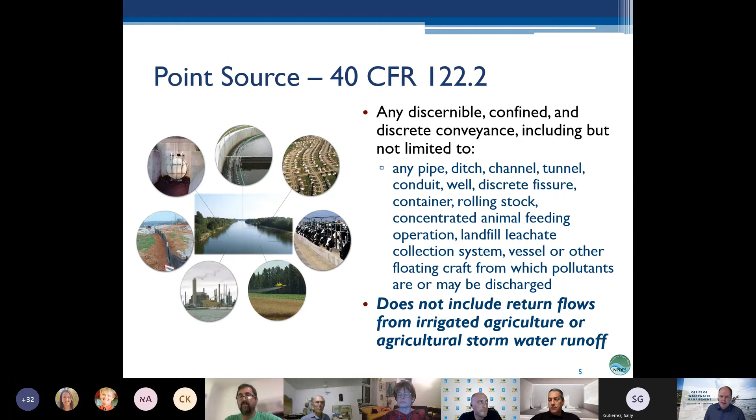So at the time, Congress just said, we're not going to make them subject to the NPDES program, but they would still be subject to non-point source programs, is what we call it, under the Clean Water Act, and state by state specific regulations of agricultural discharges. So it's not that they weren't addressed, it's just not addressed under this formal NPDES program, which was really targeted more at the wastewater treatment plants and industrial sources.

So classes of pollutants. Not going to look at that definition again specifically. Randy showed you that, but it's a very broad definition. And that's how pesticides were brought in. Pesticides themselves, the product, we don't regulate. That's regulated under a different federal act. But once they're applied, there's an application time, a residence time, and once that passes, there's a chemical waste left. There's a residue, and that's what we regulate.

So it's important to note that we regulate waste. We don't regulate products. But when a product is applied and it's past its useful application time, then it becomes a waste, and then it becomes subject to the NPDES program. That's kind of the best way to describe that. But the pollutants are divided into three primary categories under the Clean Water Act. Conventional pollutants, and these are essentially those that you would expect to see from a domestic sewage treatment plant.

Toxic pollutants. Now, this is a little bit of a misnomer. Toxic pollutants were really a negotiated list of pollutants with an environmental group and a consent decree to litigation that were then codified into the Clean Water Act as priority pollutants. So the term toxic pollutant there is really a term of art, not a description.

They do have toxic effects, but the last category, non-conventional pollutants, is basically anything that's not a conventional or a toxic pollutant that's on that specific list, but they still have toxic effects. So very important: non-conventional pollutants doesn't mean that they're not toxic, that they don't have issues. It just means they're not specifically on that toxic list and they're not a conventional pollutant.

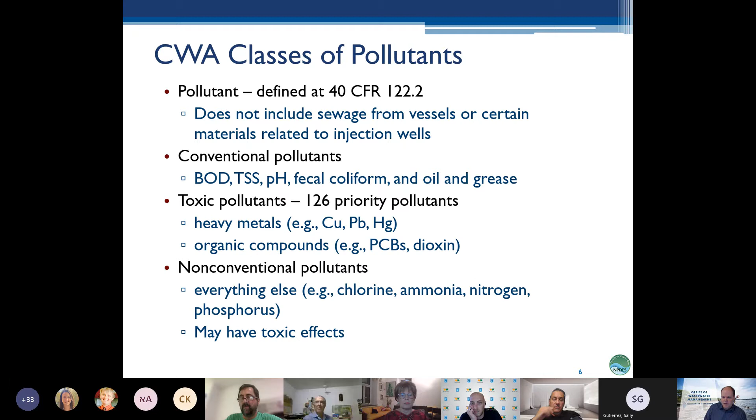So things like chlorine, ammonia, nitrogen, phosphorus, emerging contaminants fit in here as well. They're not on that list. So pharmaceuticals, basically anything else that you can think of would be classified as a non-conventional.

And last, waters of the U.S. Not going to get into this one too much. And the reason is because of how we teach the course: if you're a permit writer, you get an application for a permit that you process to write a permit. Once you get an application, someone else has already done the dirty work of deciding whether you discharge to a waters of the U.S., whether it's a navigable water, whether it meets that.

There's been a lot of litigation in the past 10 or 15 years over what is a waters of the U.S. So what we tell the permit writers is, luckily, once you get an application, you don't have to worry about that question. Someone's decided that they need to apply, and you just write a permit. One important thing about a waters of the U.S., though, is that groundwater is not a waters of the U.S., but it can be a waters of the state.

So the NPDES program does not regulate groundwater itself. However, states can have requirements for discharges into groundwater. Just at the federal level, we do not under the Clean Water Act. One thing that you may have heard about, and not to get too far off into it, but we've had some recent cases about where a point source discharges into the ground, and that flow ends up in a surface water in a very direct manner.

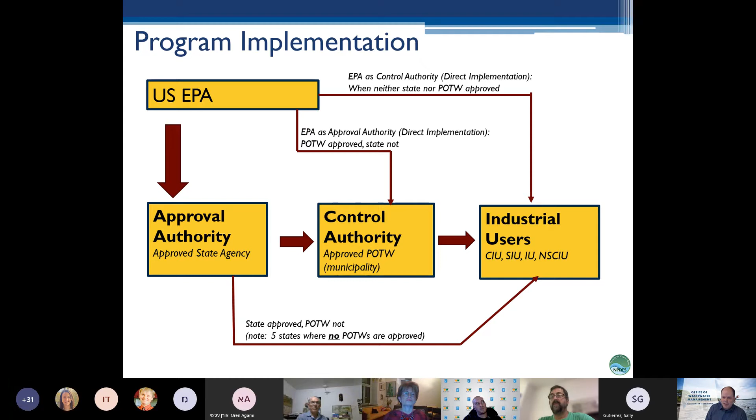And as I said, we have the pretreatment staff online. They teach a 2-day course at minimum on this, their 101 course, and they have advanced courses. So the pretreatment program, again, is a pretty complex program, just like the NPDES program. There's a lot to it.

So pretreatment standards, there's 3 main categories. There's general and specific prohibitions, categorical standards, and local pretreatment standards. I'm going to cover the general and specific prohibitions here, and I'm going to cover the categorical standards when we get to effluent limitation guidelines. They're not part of the effluent limitation guidelines, but they're proposed with the effluent limitation guidelines, and I'll talk about that more when we get to the technology limits. And then local pretreatment standards.

And an important point here is that these standards can be expressed on the industrial users as numeric limits, narrative prohibitions or narrative limits, and best management practices. And best management practices are those things where we can't assign a numeric threshold for a discharge, but we can say things like you need to sweep up better, prevent material from getting into a drain that goes to the wastewater treatment plant. So things to prevent or reduce the level of pollutant that ends up in the wastewater by implementing a best management practice at the facility.

One key thing here is that these standards are self-implementing. So industrial users discharging into a POTW have to comply with these standards, even if they don't have a direct permit in place. Now, the way that it works typically, though, in terms of determining compliance or implementation by the industrial users, is that the POTW or the control authority interacts with the industrial user and makes sure that they're meeting the requirements.

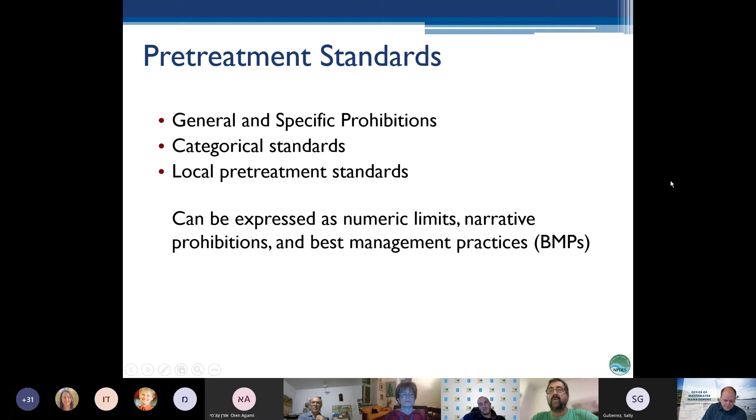So general prohibitions. A non-domestic discharger may not introduce into a POTW any pollutants which cause pass-through or interference. And so this is just that general prohibition, a narrative requirement that gives the regulatory authority to the control authority to address industrial user discharges, to put in requirements to treat or prohibit the discharge of pollutants into the POTW.

We have some specific prohibitions that are listed out, and these are pretty common sense. Pollutants which create a fire or explosion hazard, cause corrosive structural damage to the POTW or its collection system, that would cause obstruction or result in interference, heat that will inhibit biological activity and reduce the efficacy of treatment, pollutants which result in the presence of toxic gases, vapors, or fumes. And we don't want people just dumping into the system, so trucked or hauled pollutants except at discharge points designated by the POTW. So these are in our regulations, and industrial users have to comply with them.

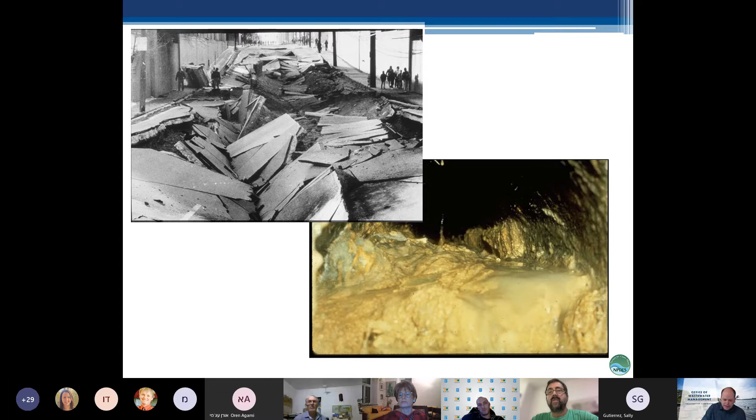So local pretreatment standards are required for all approved pretreatment programs. These are locally developed but federally enforceable. And the way this works is that the POTW looks at all of its industrial users and the pollutants that they are proposing to discharge and looks at water quality criteria, what NPDES permit limits are or might be, and other standards that may apply, and comes up with what is the allowable amount of that pollutant that can be discharged into the system. And then they look at what comes from what are termed non-industrial users, but there may still be other inputs of that pollutant into the system.

So from domestic households, there might be additional sources of the pollutant, but we don't regulate domestic households under the pretreatment program. And then often there's a safety factor. And so the end result is that they come up with an allowable amount of that pollutant that can come from industrial users, and then they allocate it to the users under these local limits. They can be chemical specific, best management practices, prohibitions, case-by-case discharge limits. But this is really how we get to this.

And the important thing here, I think a difference between the pretreatment program and your program, is that this is for any pollutant that would be discharged by an industrial user. It's not a specific list. If it causes an issue in the treatment plant or in the water body after discharge from the POTW, it can be addressed through the local pretreatment standards. So emerging contaminants, pharmaceuticals.

So how do pretreatment and NPDES interact? Well, the way that it works is the POTW, or wastewater treatment plant permits, have requirements to implement a pretreatment program. So these are kind of narrative requirements that go into the permit. They have to show that they have adequate legal authority, that they meet all of these different requirements, that they have that compliance monitoring activity. It doesn't specify what compliance monitoring they have to do, but they have to have a program that implements it. And that's how this works.

Now, in practice, a lot of times these are not well described in a POTW permit. Sometimes they're done just by reference to the regulation that requires them to do so. It's something that Jan and her team are working on with NPDES permit writers to ensure that POTWs have a better description of what is required when they have a pretreatment program that they're required to implement.

But this is really how the pretreatment program and the NPDES program interact. These POTW permits should have these requirements in them to require consistent implementation of the pretreatment program on industrial users. But just to be clear, we don't put the local limits in the POTW permit that are applicable to industrial users. That's all that separate mini program that Jan was talking about, where the POTW has its own kind of permits that it issues to those industrial users.

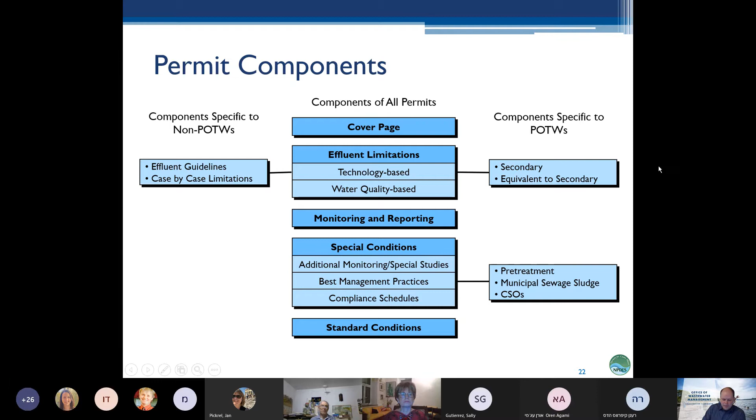So as I mentioned, we have individual application forms. The concept to take here is that we've created different forms for different industry types, different types of facilities, to make sure that we get the right information from them to craft permits. Each form is specialized to what we know about that type of facility and the type of information we need to assess their potential for discharges that cause an environmental impact. And at the bottom is our link to the application forms if you want to look at it later.

I wanted to highlight some specific application requirements. So Form 2A applies to those publicly owned treatment works, POTW, sorry if I didn't define that earlier, but wastewater treatment plants. And just to highlight here, the application requires them to identify significant industrial users.

It requires them to identify when they have outfalls to things other than waters of the US. So even though we don't regulate those discharges, we want to know what the fate of wastewater generated at the facility is to make sure that it's not ultimately ending up in a surface water, and also just to be clear to the public where it's going if it's not being discharged into the waters of the US.

And so that also includes underground injection. So we have a whole underground injection program that EPA runs. So if they're doing underground injection, then that's covered by that program. But we want to know that they're sending their wastewater to that program.

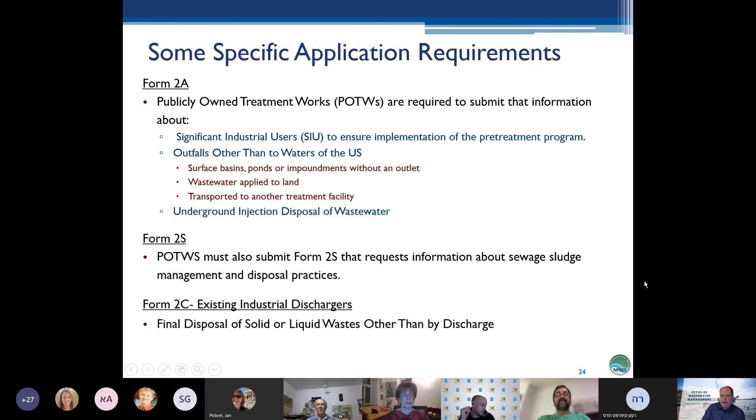All right, so technology-based effluent limitations. So just a quick, this is how technology and water quality interact. They complement each other. But what we start with is we develop TBELs derived from those technology standards for all applicable pollutants of concern. And then once we have TBELs, we develop WQBELs for all pollutants that are discharged.

And it's primarily, but where a TBEL is not adequate to meet water quality standards, we have to implement a WQBEL. So if we don't have a TBEL for a specific pollutant, then we definitely have to do a water quality-based effluent limit. If we have a TBEL, then we assess whether we need to include a WQBEL in the permit. Is that TBEL stringent enough to meet water quality standards, or do we need a more stringent limit?

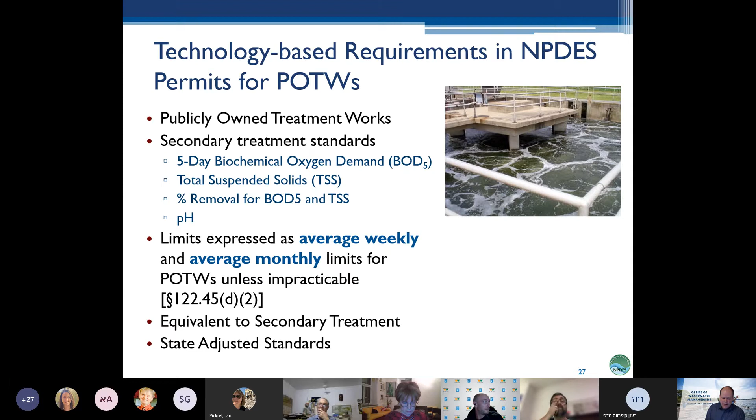And then we have pH requirements. And these limits are expressed as average weekly and average monthly limits, unless impracticable. And the Clean Water Act and the regulations do allow for less stringent requirements for certain facilities. And it's really based on when EPA developed these, what we call secondary treatment standards, that they recognize that certain facilities may not be able to achieve them. So they gave some flexibility to states to reduce them on a case-by-case basis.

So for non-POTWs, what are those controls? So these are some of what Mary Ellen covered with the BAT discussion, but we need to go a little bit further. So for existing sources, there's what's called BPT, or Best Practicable Control Technology, Best Conventional Pollutant Control Technology, BCT, and then that BAT, Best Available Technology, Economically Achievable. And these are basically increasing levels of control.

So BPT is a cost-benefit test. It's basically what technology is widely available to the industry already. BCT and BAT are a higher economic test. And we'll talk about these a little bit more at the end of the session when I get to case by case. But important here is that when we issue an ELG and we develop these standards, we also issue those pretreatment standards. And the standard for pretreatment is the same as BAT. So when the pretreatment standards are proposed, they follow the same type of analysis as we do for BAT. So it's economic achievability. And then we have those new source performance standards.

Not going to get too far off into it because new source can be a confusing topic. But basically, a new source is any facility that is constructed after an effluent limitation guideline is published. So it's not anything about the facility itself, a date and time. It's about when an effluent limitation guideline is finalized. If you're constructed after it, you're considered a new source because you had fair notice that you're going to be subject to these more stringent controls.

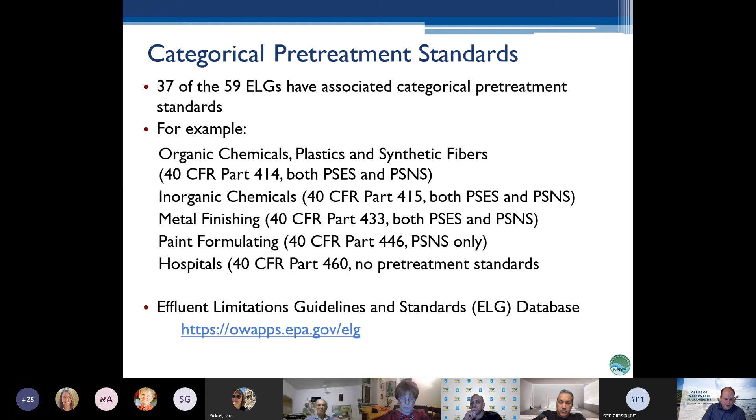And real quick, I just wanted to show you this website because it's something that just came out this year. It's incredibly helpful. It's on EPA's webpage, and you'll have that link when you get the presentation. But it's a database that our Office of Science and Technology, who develops the effluent limitation guidelines, pulled together. And so, for instance, we can search for the pollutant lead, or we can search by point source categories, treatment technology, or other factors.

But if we look up lead, what we find is it will tell us all of the effluent limitation guidelines where there's limitations on the discharge of lead, and tells you the range of pollutant limitations that are in each industry. And that's a good point, that each industry may actually end up with different limits based upon consideration of the same technologies, because there may be different interferences or different economic achievability. So each industry is assessed uniquely.

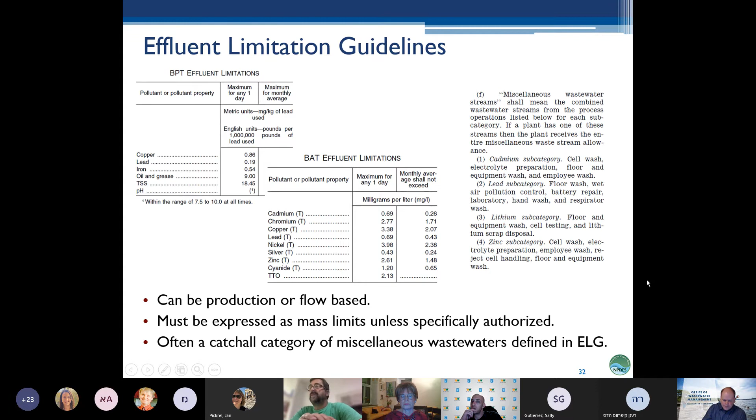So here's what I was talking about. So we have the effluent limitation guidelines, which are those published guidelines, but the Clean Water Act and our regulations also give us the authority to do case-by-case limits. So where the effluent limitation guideline did not apply to a new process or to a pollutant that was not identified in the development documents for the ELG, we can develop case-by-case technology limits.

It's basically doing a mini effluent limitation guideline development. So we consider the same factors that are considered by EPA in developing the ELG. We use the same economic cost tests, BPT, BCT, and BAT, but it's done for that individual facility. And so it's burdensome on the permit writer to do it. So I'm not going to say that they're a common thing that happens, because you're asking a permit writer to become an engineer, an economist, and everything else in between as they develop these. But where there is an adverse environmental impact, often states will put the effort in to do these.

One thing you'll find, and Rob Wood and Mary Ellen referenced it, there's a lot of pollutants that have been reduced in terms of the amount being discharged by the effluent limitation guideline program. But remember, the backstop to this, and we're going to get into it next, is the water quality based effluent limits. And often water quality based effluent limits are more stringent than the technology limits. And so even if you calculated case-by-case limits, you may end up with a more stringent WQBEL, and that's the limit that's going to go into our permit.

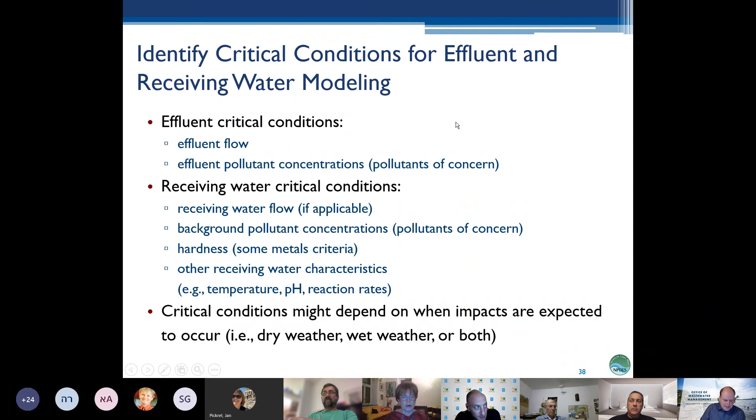All right, so I am going to have to speed up a little bit because I know we're getting close to the end of time here. I apologize, but we had some good questions.

Often we use a simple mass balance equation, which makes life simple and easy, and many of the permit programs use this. So essentially what's upstream from the discharge equals what goes downstream, and we use that to calculate our limits.

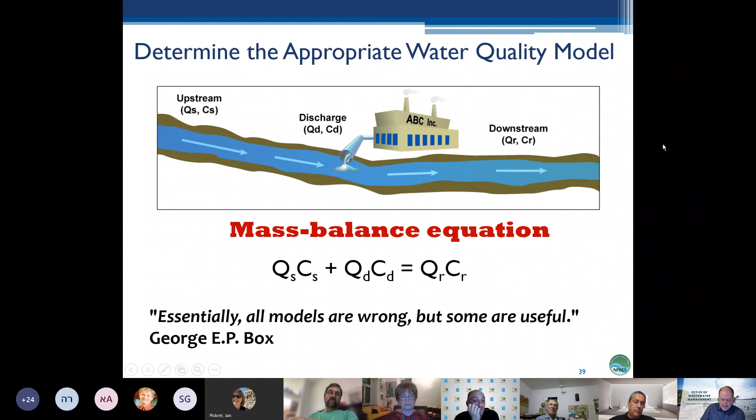We do have a process called reasonable potential analysis, and this basically determines whether we need to include a limit or not. This is a conservative estimation of what the highest discharge of pollutant would be from a facility, and whether that exceeds the criterion when we look at the receiving water concentration. We have to account for the variability of the pollutant or pollutant parameter, and this is where we use statistics to help us.

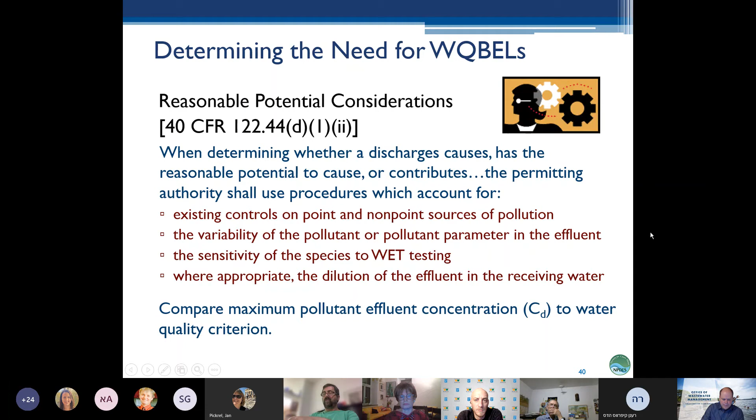So when we're determining that critical value, the maximum effluent concentration, we have limited data often. So we may only have 6 data points. We determine that typically for effluent data, a log normal distribution best fits the data. But when we only have 6 data points, we don't know if they look like this or they look like this. So we use statistics to help us out.

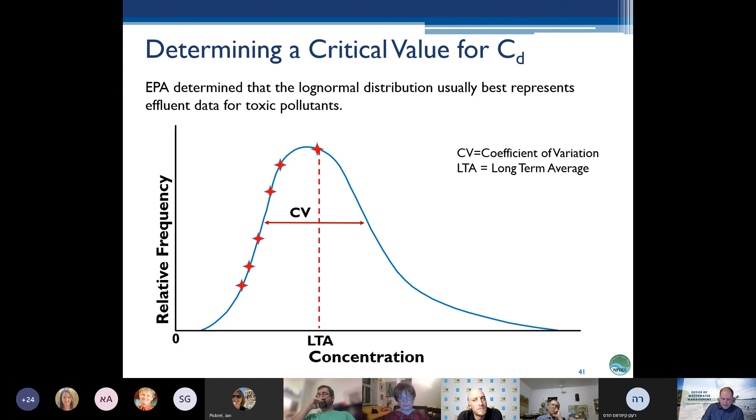EPA looked at a lot of effluent data sets, large data sets, and came up with a statistical approach that accounts for how to translate small data sets into a maximum effluent concentration. And we use the coefficient of variation, so the variation in the data, and the long-term average to describe this log normal distribution, and then use that to implement the statistical approach. So in this case, we want to find that highest concentration or estimate it, and we use a CV and LTA to get there.

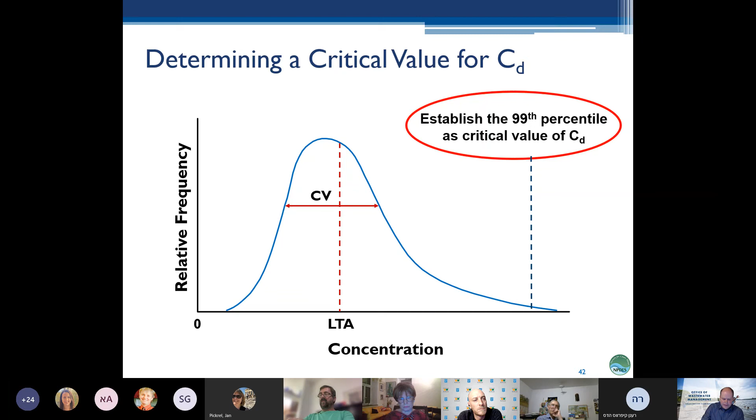So if we were just collecting data, to be confident that we were out at this 99th percentile, we'd have to collect 330 data points. We often don't have that data. With an application, we may only get 1 data point. So what EPA did in looking at all of those large data sets was to come up with a ratio or a multiplier between the 99th percentile and lower percentiles. And we have these in an equation and a table.

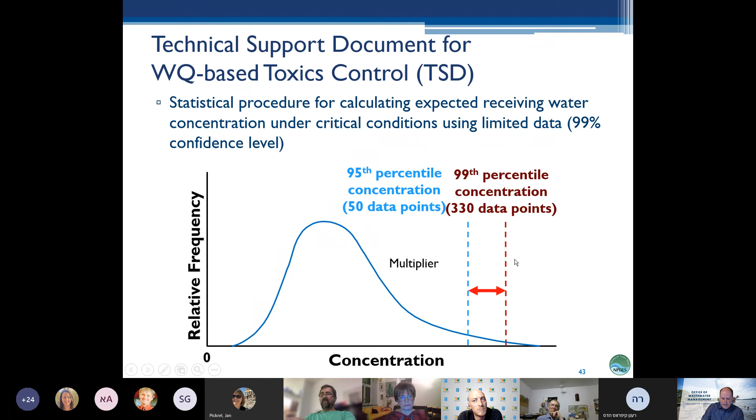So when we have small data sets, we can multiply by a factor to estimate what the 99th percentile would be. And as we get more data, that multiplier gets smaller and smaller. So you can see at 50 data points, which is essentially monthly sampling over a 5-year permit term, we get to a very small multiplier.

So once we determine reasonable potential, we compare that effluent quality to the criterion. If we have reasonable potential, we develop what's called a waste load allocation. And this is basically looking at the criterion and the flow downstream. We use that same mass balance equation, and we calculate what the maximum effluent discharge could be and still meet that criterion. And that's what's called the waste load allocation.

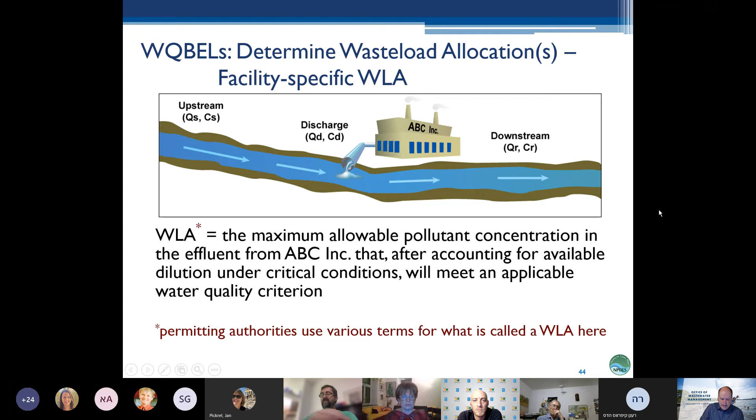A waste load allocation, though, is not a water quality based effluent limit because the duration of the waste load allocation is based on the duration of the criteria. So it's a 1-hour average or a 4-day average, and we're turning that into a daily average or a monthly average. So we have to use statistics to translate the waste load allocation to a final limit.

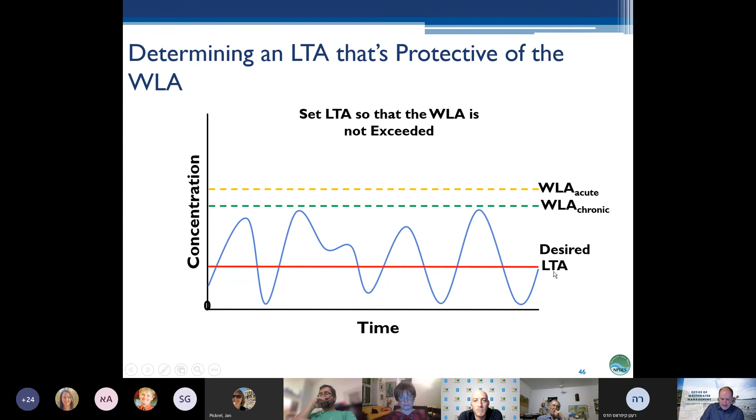So what do we do? Well, we know our waste load allocations for acute and chronic criterion, and we have our data. And we know the long-term average of our existing data. What we want to do is decide what LTA is necessary so that the data would never exceed those criterion. So that's what we're doing. We're basically taking our waste load allocation and translating it into a long-term average that would be protective of that.

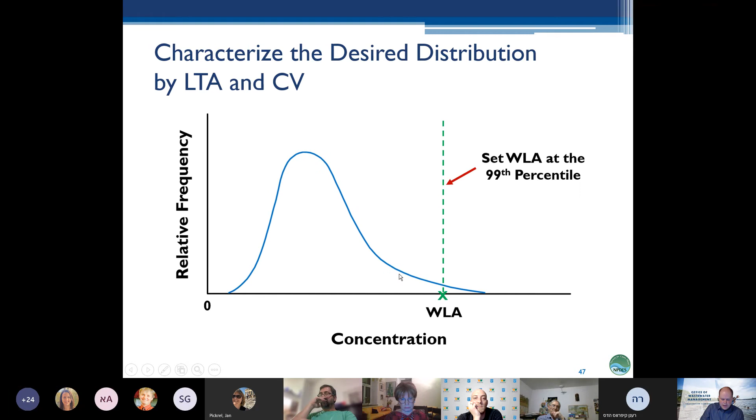So we have our waste load allocation, and we adjust our log normal distribution so that the waste load allocation falls at the 99th percentile. Then we can describe that with our LTA and CV. Then we take that LTA and we use statistics to translate it into the limits, because the LTA takes out that duration factor. It basically turns it into a long-term average, a multi-year average that we can compare to for the different criteria. And then we take the lowest LTA and translate that into the limits.

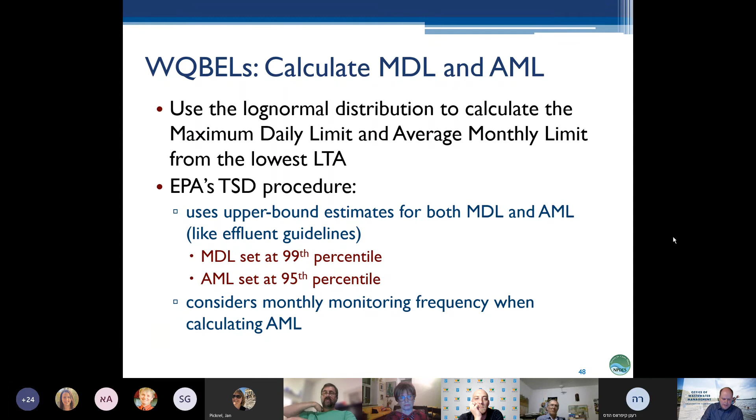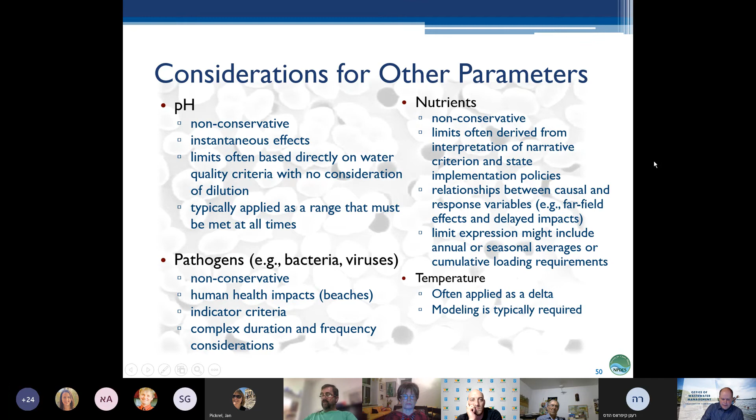So once we have our final effluent limits, we compare the TBELs and WQBELs. Then we do something called anti-backsliding. So we compare final limits in the permit to limits in the previous permit. And we can't backslide unless we meet certain requirements. So if someone's achieved a level of treatment or effluent quality in a previous permit, we don't want to say you can discharge more. They've demonstrated they can achieve a more protective effluent level, and we want them to maintain that.

And this is where we do the anti-degradation review that's required in the water quality standards. So we look at whether final limits allow new or increased pollutant loads. And if they do, we have to go through an anti-degradation process. And it's basically saying, is it necessary and important? And there's 2 types of analysis that are done. And so this helps us ensure that if we're allowing a new mass loading into the water body, that it has been evaluated and the public has a chance to weigh in.

Then special conditions are used in NPDES permits, as I mentioned, to address those unique situations, to incorporate special studies, more monitoring, the pre-treatment programs, sewage sludge requirements. So once again, very straightforward to some extent, but this is where the permit writer has the most flexibility for how they incorporate it.

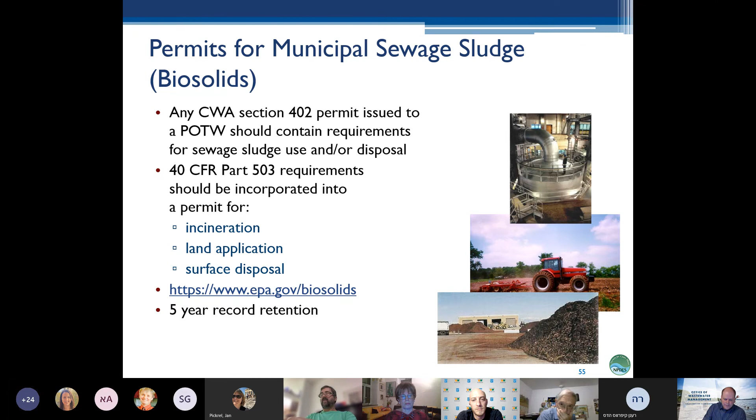And last, the list of standard conditions. So these are those conditions that I mentioned that basically standardize what a permittee has to report to the permitting authority across the entire NPDES program. So there's a duty to comply with the limits, a duty to reapply at the 5-year period, that they mitigate any adverse impacts, they exercise proper O&M. So you can see kind of the theme there.

It's just a standard approach to make sure that the permittee is doing what they said they would do when they applied for a permit, and that we're getting the appropriate information from the facility to determine compliance with the permit conditions.

And then monitoring and reporting. Monitoring has to be representative of the monitored activity. So we have to have the type of monitoring, grab or composite sampling. If it's a monthly limit, we want to make sure that we're getting the appropriate sampling to determine compliance. A daily limit, same thing.

As a facility collects data over multiple permit terms, sometimes the monitoring frequency is reduced because they've demonstrated that they're consistently meeting the limits. And so we have some confidence that if we reduce the monitoring, they're still going to comply with their limit requirements. So we do have that component that often comes into play when we have a long-term discharger.

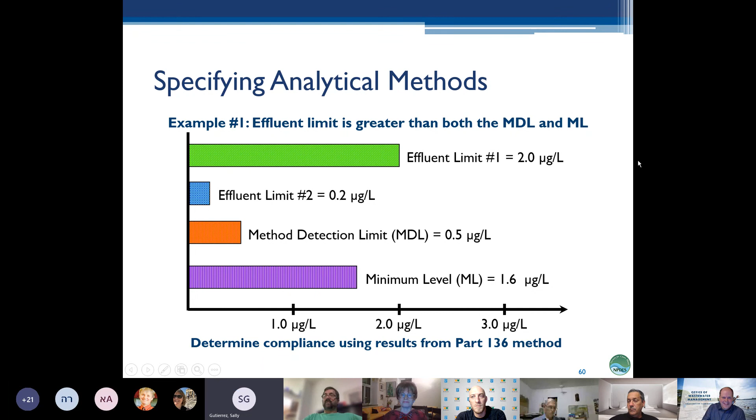If a facility monitors more frequently than required using approved methods, they have to report that data. So they can't kind of do their own internal testing and then say, oh, we're only going to give you what's required. They have to give us that information. And typically we get reports monthly, but the permit can establish a less frequent or more frequent reporting basis.

And one of the big changes was in 2015, we started phasing in electronic reporting. So before that, facilities could submit paper reports to the states. The states had to upload them into our system. It was just a burdensome process to get data into a database. So we transitioned to an electronic reporting rule where permittees will be required to submit their analyses electronically, and it'll just streamline compliance efforts and entry of the information into an accessible database.

So administrative process, I'm going to just go ahead and skim through, and we'll get to the last slide where we give you the information. The important thing about the administrative process is just that it is a chance for EPA and the authorized states and the public to interact and determine that the limits in the permit and the conditions in the permit meet the Clean Water Act requirements. I mean, that really is the summary of it.